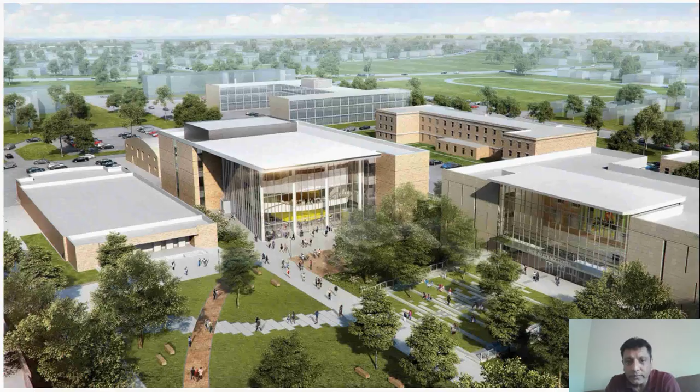This is another rendering that got a little bit simplified. You can see this is the building right here. One of the major challenges was, of course, the landscaping, because there are multiple feet of difference from the ground to getting up to the first floor. So when we saw just the exterior rendering, it was something that we wanted to do. It was an exciting project. Till we saw the interior rendering. The idea for the new building was to create a floating structure, because this is a science building.

And these days, we have a couple of other major projects in the office where we are working with campuses. They want to create state-of-the-art facilities, whether it's engineering or science and technology. So what they want to show, and as an engineer what we want to show, is something different. So if you see something like this, the first thought is how you're going to support it. And that's the traditional thinking, right? We always want our columns to be supported from ground, and we want to have the framing.

The other challenges are, and I'll show you a simplified rendering also, you have a corridor on the exterior, and you have the public space in the center where students can gather. So major issues are not only strength and deflection, but also vibration. You don't want the kids running around the corridor in the exterior, and interior spaces where people are trying to concentrate getting disturbed by the vibration. So you have to make sure that not only you can support this structure and all the loads, but at the same time the structure is stiff enough to provide the vibration resistance that you need.

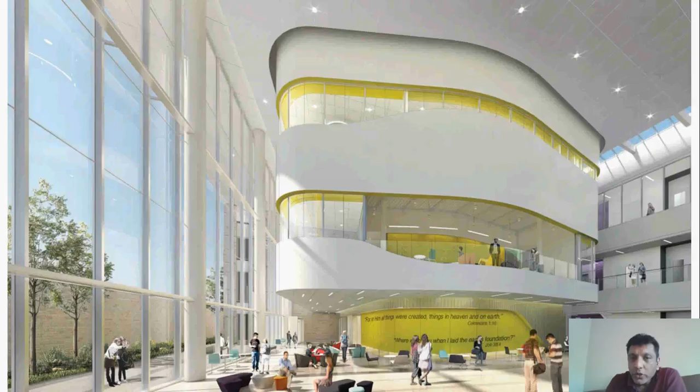So this was the simplified version. Still, the idea was you don't see any columns here. This is a floating structure. You don't see any columns, and then these side wings were traditional construction. Even though we had columns on the exterior, they didn't want it to connect to the exterior so that it looks like it's floating in the middle. And you can see even within the ceiling, it was a separate structure. So we were looking at options, what we can do differently that can support that and provide the stiffness that we need.

In this picture, you can see the exterior still has the corridor, public spaces. People can gather on both floors, and inside the spaces are the auditoriums where you have major classes going on, presentations and all that. So same concept, keeping the structure stiff enough to minimize the vibration. So when we saw this rendering, our first thought was the exterior, they wanted to have a very thin construction. But the interior, we see a little bit more mass where we can have heavy structure within that ceiling space. So that actually was the basis of our design: what we can do to capture that thicker section within the ceiling space and support this structure.

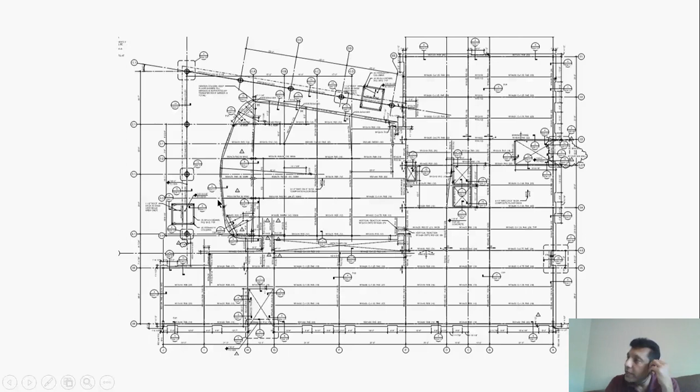But then we said, okay, we saw the rendering and we have some opportunity to add some vertical hangers. So we picked some locations where we saw some opportunity outside of the glass facade, and we added some hangers. A very simple design. The only thing was making sure that there is compatibility when you have columns that are ground supported. Throughout the building, columns are ground supported, and now you have members that are ceiling supported. When you release those columns, there are going to be differential deflections between the two. One will transfer the load directly to the ground, one will take the load to the ceiling and then transfer to the ground. So I wanted to make sure that we take that into account.

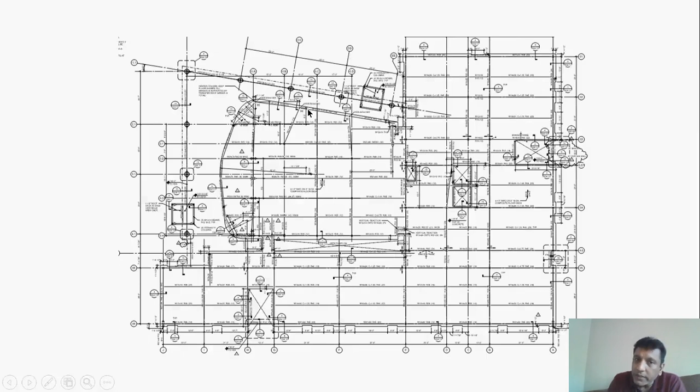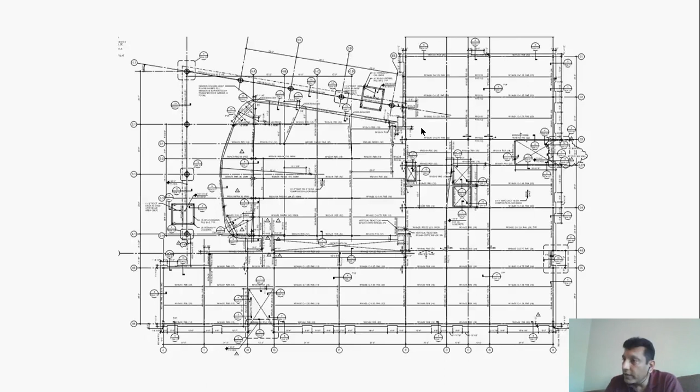So one of the things we did is the sequencing was important. So we worked with the design team, we worked with the contractor, making sure that we sequence these in a way that all these areas were shored. Even when they had the hangers in, all the roof, everything was done before the shoring was released slowly, and we measured every time they removed the shoring to make sure that these hangers were deflecting to an amount that was our basis of design.

And this is the roof level where you can see that the framing was going in all different directions. The reason for that was we were trying to put a hanger in a curvature, and we had to allow the framing to line up wherever we could find a location for the hangers. And this is the exterior of the building. So this line represents the exterior. This inside is the part of the building. This is the exterior cantilever. So not only did we have the challenge of hanging the part in the center, but also we had pretty decent cantilevers, some about 20 feet or so, and staying with a very thin profile outside.

So what we decided is, what if we take these exterior columns, which are supporting the glass; we have the opportunity to frame, not at the floor level, but at the roof level. So this is our roof plan. We took the interior columns, we took the exterior columns, and we added a bunch of transfer girders. And then we started hanging the hangers from these transfer girders. And then one thing we did was, once we touched the exterior column, we started tapering the members to a very thin profile that can cantilever all the way out.

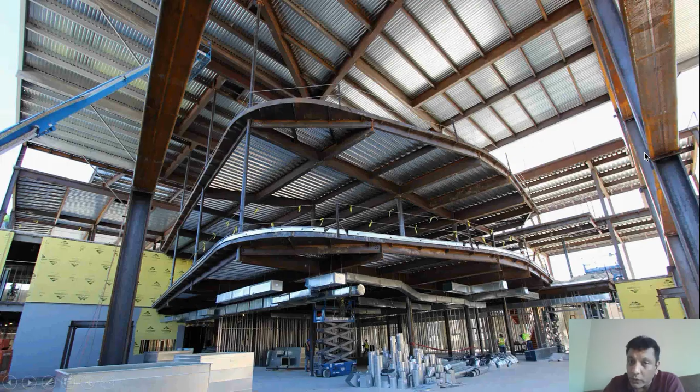Again, we didn't use cable structure. We didn't use anything that requires extraordinary cost. Anything that was not available. Steel members and concrete and steel hangers. That's all we used. So this is what it looks like, and this is during construction.

And you can see that these were the steel members that were going all in different directions. These were about W30 members, and then you can see these are our hangers. Very thin profile for the hangers. Columns were again 24 or something, W12 or W14s. These hangers were 8 inches in most cases, but we tried to stay with 6 or 8 inches combination, wherever we were able to fit behind the solid wall so nobody can see it.

And you can see that framing right here, all this is kind of a combination of cantilevers, outriggers. We tried to frame as thin members as possible. And then at the same time, about 20-25 feet of cantilevers outside the building with a very thin profile. And when we designed it, even the steel fabricator was worried that these will deflect while they are installing the steel. So you can see that they added these diagonal stiffeners or kickers to temporarily hold everything while they are building this structure.

So this is the stage or the phase of the construction where all the bottom shorings were removed, concrete was poured, and now we have a structure. The only thing was, of course, this was not loaded for the intended occupancy. So this was during construction, and it was pretty much done. MEP is hanging their ductwork, exterior cladding started. So this is, again, a very complicated structure, but we didn't use anything out of the ordinary. Steel and concrete is all we used.

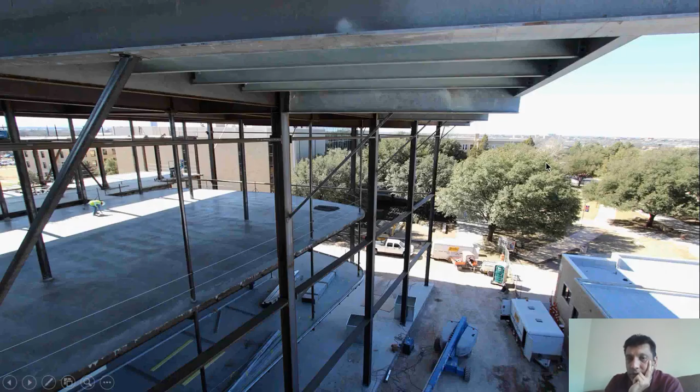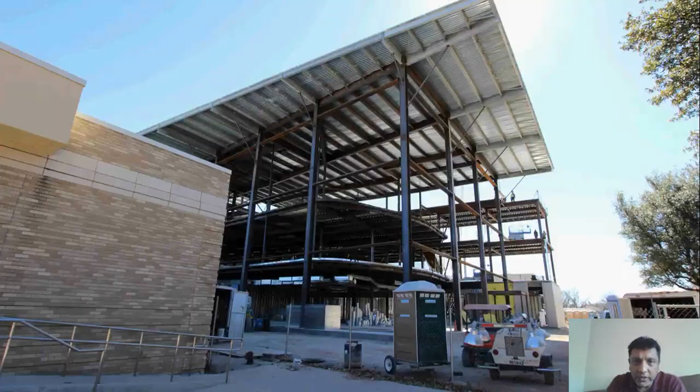And you can see the reason they didn't want to have the column, because they wanted to have this gathering where hundreds of people can gather without having to deal with the columns in the way. So this was pretty much a public space. One thing that I forgot to mention in the beginning is the site, and let me go back to the first slide. I just want to give you a perspective.

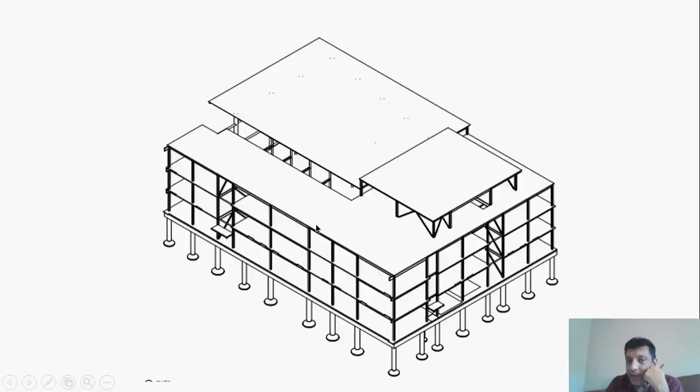So this building was opened. It's completed right now. This campus has a whole lot of international students. And this is one of their latest buildings.

If you go to the Abilene Christian website, you can do a virtual tour of the building, and the result came out really good for everybody. So I think the message that I wanted to convey through this presentation was we stayed within budget, we stayed within schedule, we didn't change the design intent. The donors were really happy because they saw what they were putting money in. They saw their vision there.

So it worked out really well, and not using anything that was not available. The contractor was really happy. We were profitable. The contractor was profitable. As an entire design team, we were able to deliver this one within cost and within the schedule.

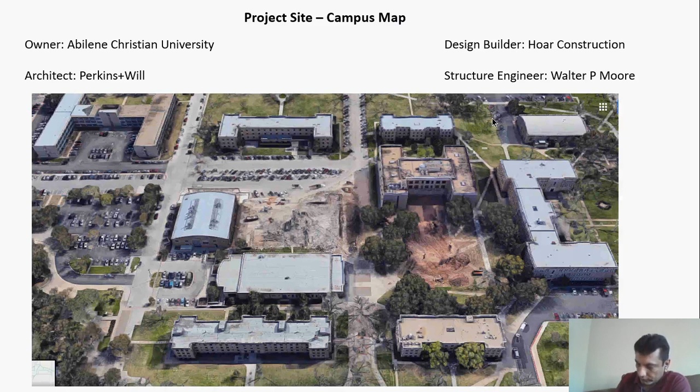Someone has a question, but I don't know who that person is. Do you mind writing in the chat box, please? I don't see anything pop up in the chat box. Yeah, me either.

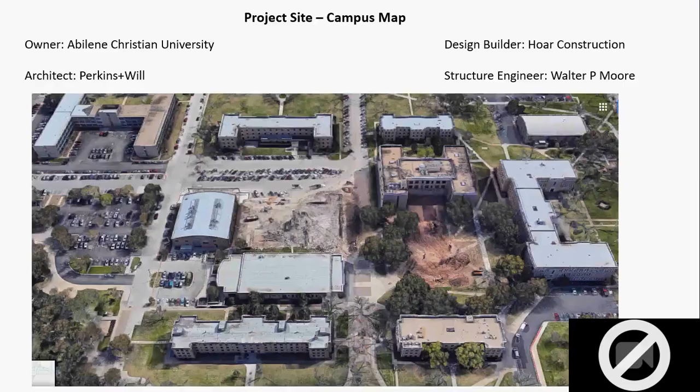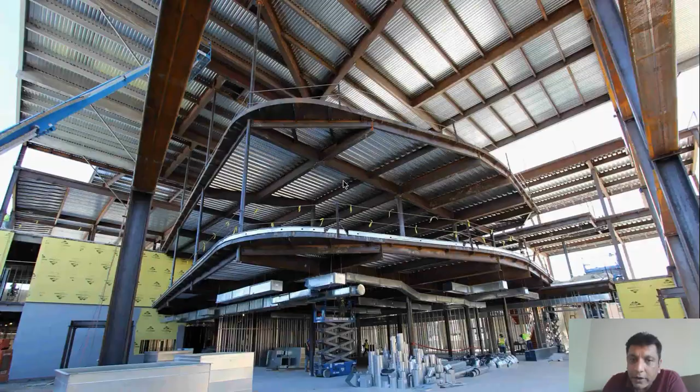There is a question from a student asking about the difference between the types of cantilevers used in this building. The cantilevers were all the same. Let me pull the image right here. This is the building line. All these cantilevers outside are wide flange, W10, W12, W16. For the pod area, in the backup we use W24, W27, but we start tapering those members, because you need the maximum depth at the support for a cantilever. At the tip, you don't have much force, so you can always taper those members.

Same thing with the roof construction. We try to have as much material in the back end and then start tapering off to get that thin profile at the end. So everything is wide flange. The color difference you see: in the U.S., especially in areas with corrosion issues, we galvanize the steel, so that's why you see this silver color. These interior members are in the air-conditioned space, so we don't need to galvanize. In terms of different cantilevers, everything was a wide flange section.

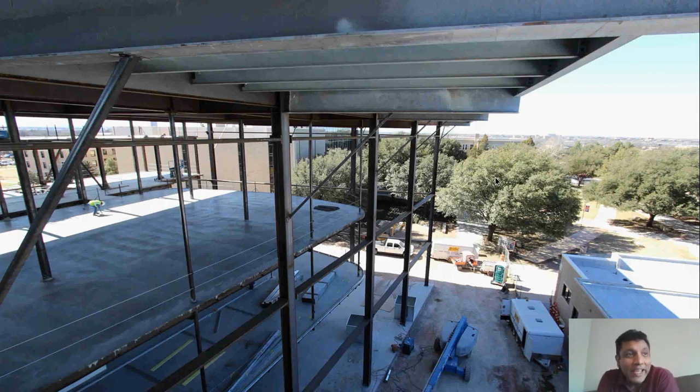The next question is, what are the difficulties an engineer can face in a design-build delivery system? Very interesting question. My first design-build project was back in 2002. That tells you how old I am. In a design-build project you are working for the contractor. Typically, we tell the contractor what to do, but in design-build, the contractor is telling you what to do, and you have to find a balance.

It's really important to select the right design builder. You don't want to work with someone with a reputation for cutting corners, because at the end of the day, you are the one signing and sealing the drawings. One of the responsibilities of a registered structural engineer is life safety, and you don't want to jeopardize that, or deliver something with vibration, deflection, or serviceability issues. Not only can you get sued for damages, but you are trying all these innovative ideas, and your reputation is on the line. So make sure you find the right design builder. We get a lot of requests to team up with design builders on multiple projects.

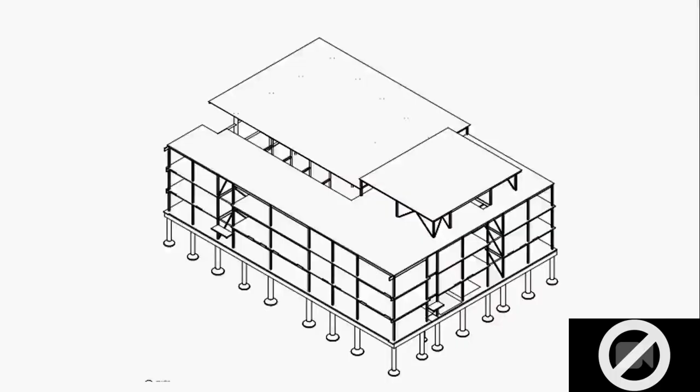There was one word that you kept repeating, was rendering or something like that, right? I'm sorry, I don't have the correct vocabulary. You mean the initial one, or which one? Yeah, go to the slab, the one where you are showing all the structural elements. Okay, this one? No, go back. Further. It was your drawing, your plan, rendering. Oh, okay. One of these? Yeah. So what was it, rendering or retrofitting?

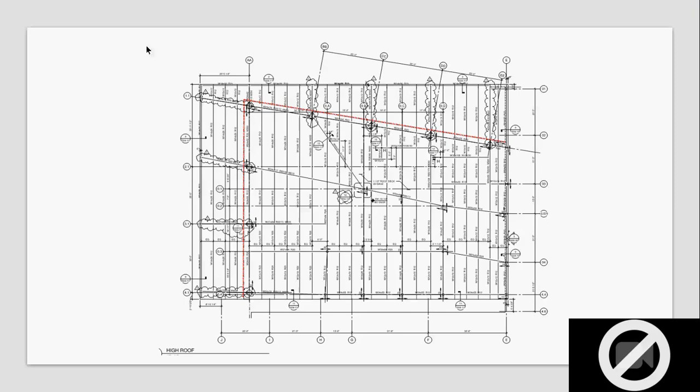No, this is the new construction. One is the renovation part. There were two buildings that we did at the same campus. One was the renovation of this one. I didn't touch a whole lot on this one. Most of the presentation was on this building, but part of this project was renovating this existing building. And since we have a few minutes, I'll just briefly tell you the challenge on this building was, of course, we tried to minimize as much as possible.

These were very thin stones that were specially bought from Italy, and the connection of the stone was a challenge because we have a post-tension slab system with all the tendons where we wanted to attach the angle to support the stone. So we had to scan every single inch of this exterior and find places where we were able to drill holes to support an angle so that we can support this stone. So all this stone cladding was the major issue.

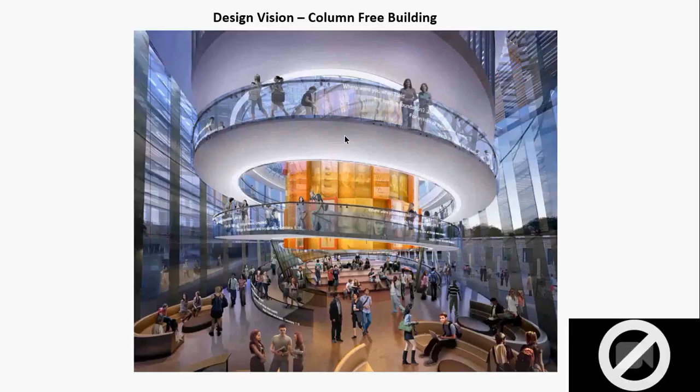So to answer the question, if you are asking how to adopt design build delivery system in Pakistan, I think there needs to be a discussion with the major contractors in Pakistan if they are willing to do that, and also it takes a lot of education for the owner to make sure that when you are doing the design build project, you are giving the control to the contractor, and as an owner you don't have that control because you gave the money and you gave a program to the contractor to go and build. You cannot micromanage. A lot of owners don't understand.

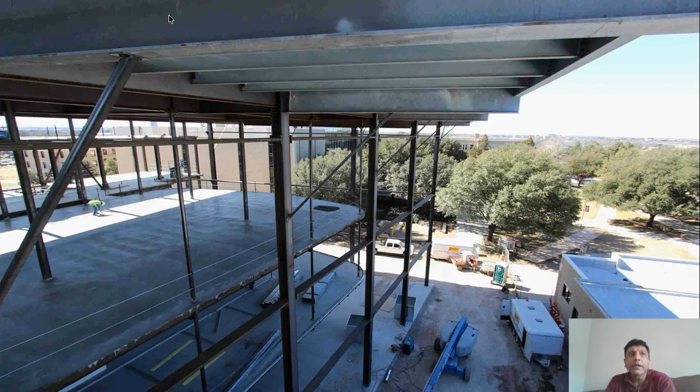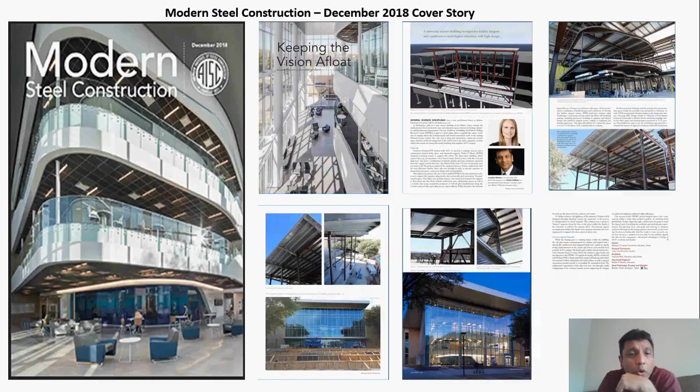There is one more question, Karim. It says, does design build indicate that construction and designing process go side by side? In most cases, yes. Not necessarily, because even when the design builder is selected, they will not start construction till the design is done. But what we have done in most of the cases, even in recent days, there's always an early structure package, because what the contractor wants to do is let their subcontractors start designing steel and concrete while the architect is doing all the glass selection, interior walls, paint of the wall, and everything. So they give more time to the architect to finish the material that's not critical, but they want to go ahead and start building the structure.

So sometimes we do early packages, but we want to make sure that when we do early packages, we have all the information, and at least the design intent from the architect, to make sure that we are designing to the correct loads.